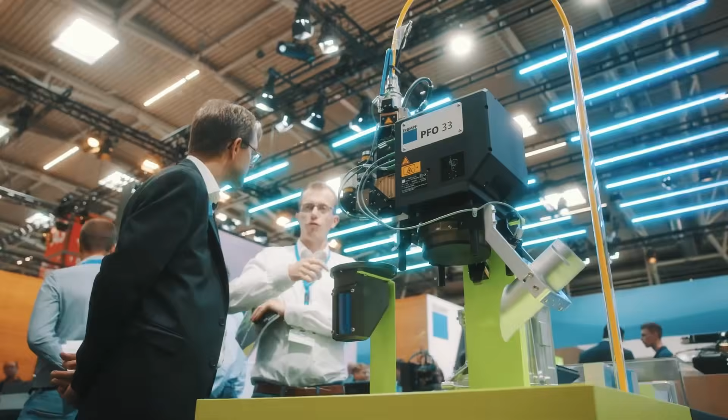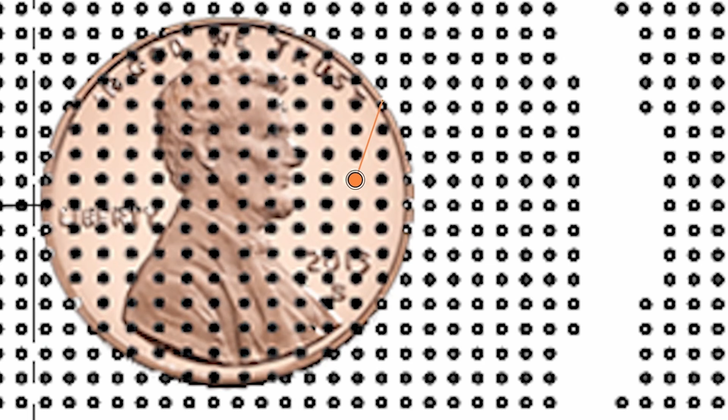Eastern, 3 p.m. in the UK and Ireland, and 4 p.m. Central European Winter Time. This session explores the latest advancements in laser cutting and drilling technologies, two areas transforming industrial manufacturing in aerospace, automotive, electronics, and medical devices. Laser cutting uses a focused beam to melt or vaporize material along a precise path, while laser drilling creates micro-scale openings in metals, composites, and polymers. Together, they drive efficiency, precision, and sustainability across production lines worldwide.

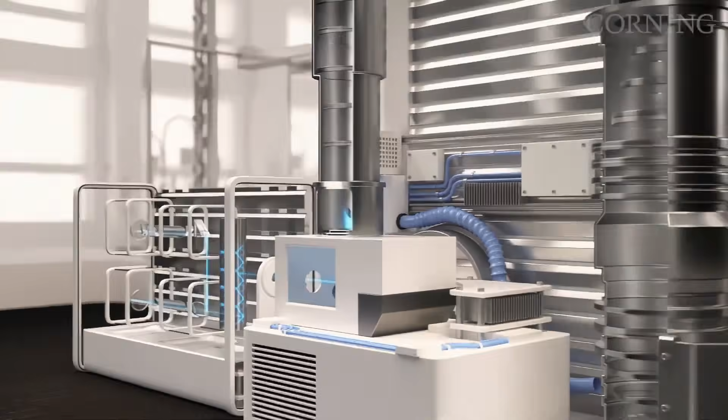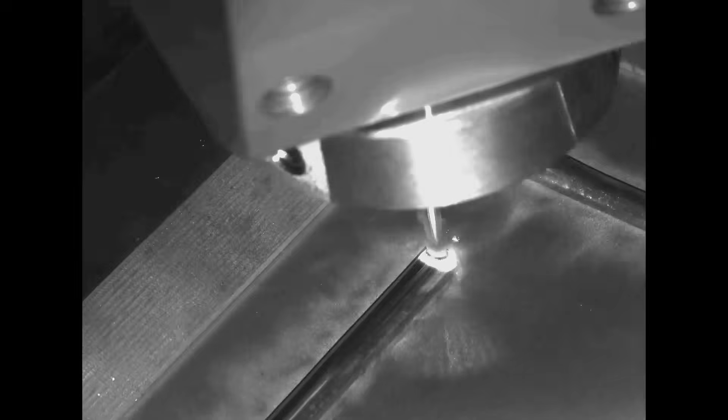We'll have featured speakers from Corning, Precitec, and Trumpf. We expect to hear about metal additive manufacturing, making it possible to produce intricate geometries that traditional methods can't achieve.

And representing technology enablers, we welcome active Optica corporate members, RayVen, Akoneer. Akoneer is doing laser machines. And who can forget the demos in Munich from Fluence Technology. You can knock it, bang it, but the pulses, they are constant, they are stable.

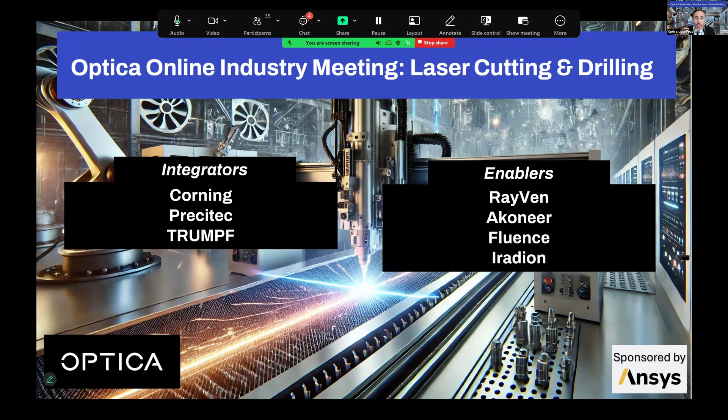Over the next 90 minutes, all of you are panelists. All of you are here to share what you can do for others and what others can do for you.

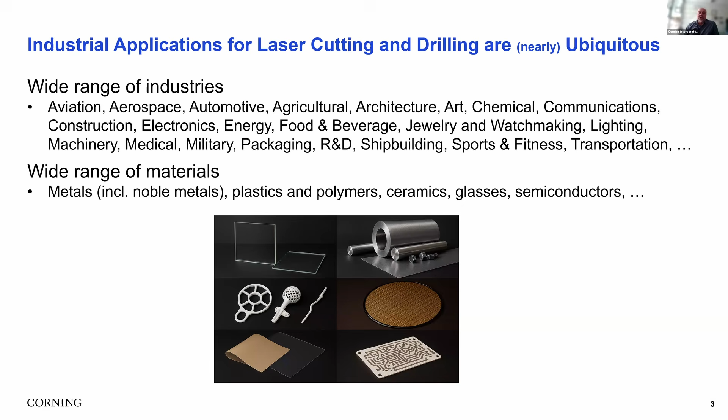Lasers are used to drill and cut virtually any kind of solid material. They're used in cases where you need very high precision, or very low loss of materials, or very difficult materials to cut. So they have very powerful advantages: high material utilization, very high precision, like I said. They also have very large process windows, so they're very stable.

And there are very strong trends in the industry that are favoring the large adoption of lasers, including miniaturization, which is pushing very high precision, automation, which is pushing scalability, low cost, things like the integration of Industry 4.0. We're developing next generation of materials, composite materials. We're using a lot of glass, very Corning here. So we've got thin, brittle materials, things with coatings.

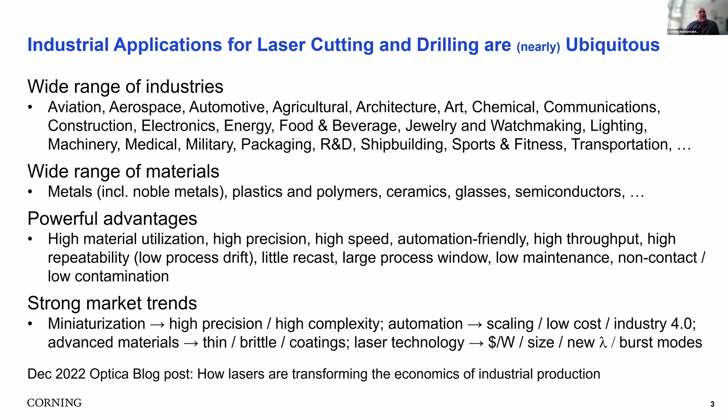And we also have rapid progress in laser technologies themselves. So you've got the sort of dollar per watt trend is decreasing, so things are much more affordable now. You've got size and form factor of lasers that are reducing, and you've got new wavelengths, things like burst modes. They're enabling lots of other additional laser technologies. And if you want a little peek into this, there's a plug here for a December 2022 Optica blog post, how lasers are transforming the economics of industrial production.

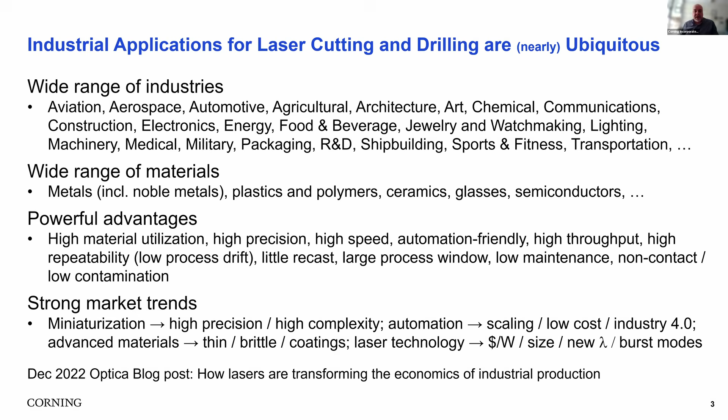So let me give you a little bit of insight into how to get all this started, what's important. We've got critical inputs here to your laser process around wavelength and pulse energy and the kind of optics that are used. Generally, people use Gaussian or focused optics to create focused spots. There's also other flavors of optics, such as Bessel and non-diffractive optics, flat beam, flat top optics, vortex beams, and a whole other slew.

You can even interfere beams together and create large area arrays. So you generally have a separation, or two different modes. You can have a thermal process, and these are more on the continuous wave optics side. This is basically ablating, or heating and vaporizing material. You can see here sort of a ChatGPT-looking image of volatilizing material. It's coarse, but it's very widely applicable.

Or you can go the other range and, with ultra-short pulses, start ripping electrons off of materials and creating very precise plasma plumes. This has a minimal heat affected zone, can be very precise and very powerful.

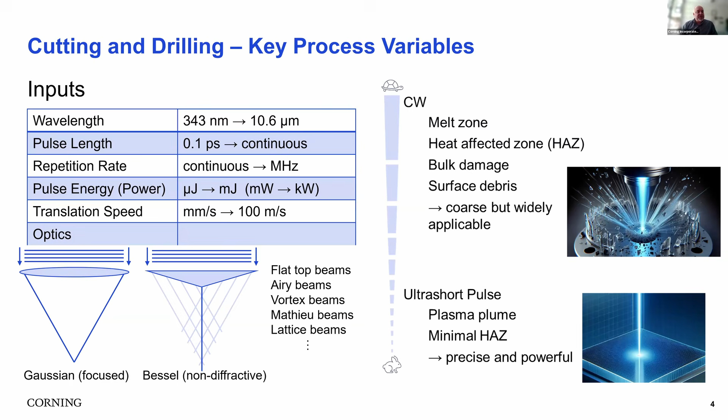In terms of outputs, you've got lots of quality metrics here about strength, edge strength if you're cutting, straightness, and if you're using a brittle material, you've got chips and potentially resistance as you're separating materials. On the drilling side, you've got surface strength, wall roughness, and if you're making holes, you're looking at maybe circularity or the concentricity of a top hole and a bottom hole.

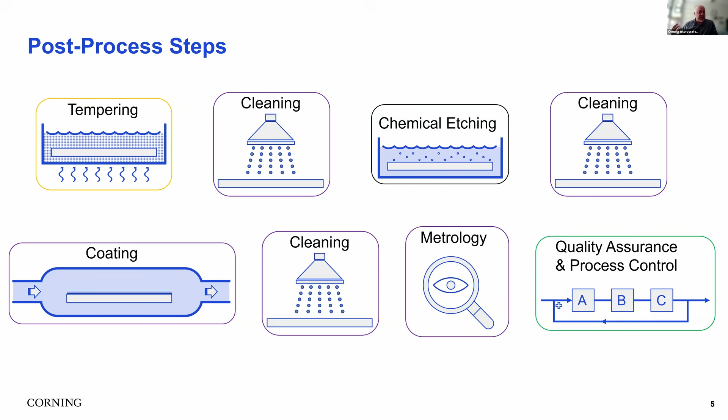If you're making vias, maybe you've got incomplete vias. So it's a very wide range of quality metrics. Don't forget, you've got post-process steps. You need to potentially temper the material once it's been cut. You've got chemical etching or coating, several cleaning steps as you remove debris or accumulated environmental contamination. There's a metrology step that feeds into quality control, and then QA and process control where you feed everything back and improve your process. This is in addition to packing, shipping, and all the other processes as well.

Let me make a little plug here for precision machining in glass. You can use Bessel beams, or non-diffractive beams, to cut very rapidly through glass in a process almost like tearing a paper towel. This is a very rapid way, a meter a second or even more, of cutting very thin brittle materials such as glass. You're looking at damage and etching of vias. You can do this by creating damage sites in an array, then use etching to expand those damage sites into vias. This can be used for, say, the electronics industry.

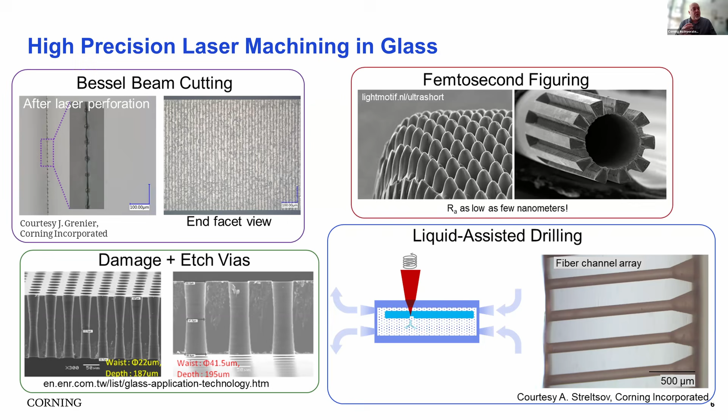In order to work very precisely with a low roughness figure, you cannot beat femtosecond figuring. This can apply very smooth, nanometer-level roughness if you've got time to do it on materials. You can even use more sophisticated processes such as liquid immersion if you want to really mitigate thermal effects and create complex, long, high aspect ratio channels.

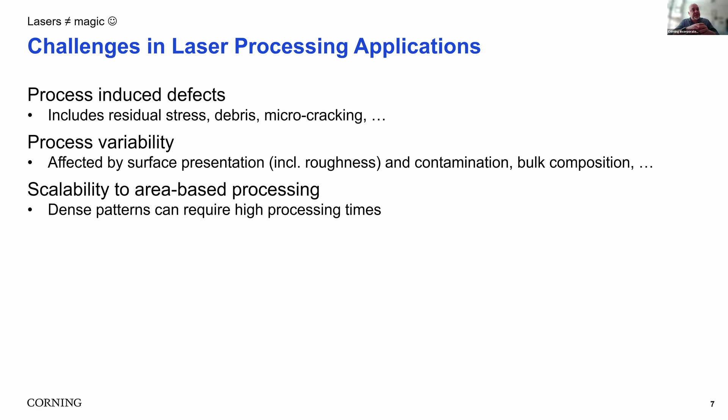Still, lasers are not magic, so there are some challenges in laser processing applications. One is process-induced defects, which can include things like residual stress or debris. You've got process variability, so lasers can be sensitive to roughness or waviness on the surface, contamination, and potentially bulk composition uniformity. There's certainly a challenge to scale laser-based processes to dense arrays, trying to make very small textures across very large glass, for instance. That can be a challenge in terms of time and cost.

Overall cost for the system can be a challenge if you're using things like ultra-fast systems, or you need a lot of them to cover a large area, so capital cost can be a challenge. And then, as we look to transfer new processes into manufacturing, there can be a challenge with this technology transfer piece - that's receivership, either process receivers or equipment receivers. This requires highly trained staff, so that has been, and can be, an obstacle.

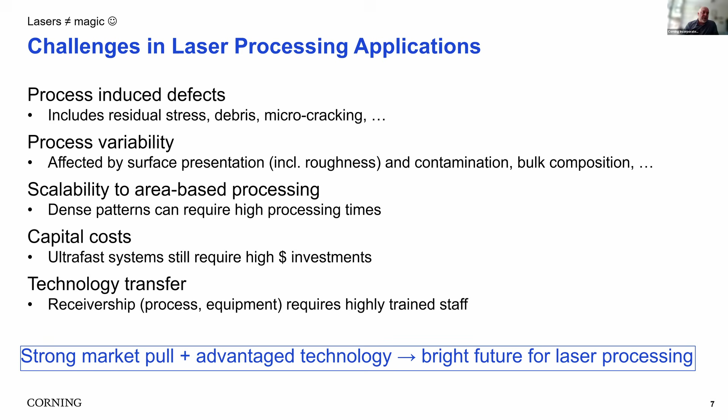But overall, a very strong market pull, very strong trends in advanced technology using lasers. So I think there's a very bright future for laser processing, and I'm excited about the rest of the panel here and the kind of technologies that they're presenting.

Thank you so much. And actually, if we can put your previous slide with the challenges back up - yeah, this is one of the things. What are the major challenges for Corning, and what can the industry help you with? What could be coming from the industry, from the neighbors, to help Corning succeed on these challenges? Yeah, certainly - sorry, was that a question to me? Yeah, that's a question to you. That's a question to Philip, yes.

Well, certainly, because we have a lot of brittle materials, ultra-short pulse lasers are a key component of how we do laser processing. So the cost, form factor, and reliability of that technology is a big part of it. If I had to pick one thing here that could be influenced by the industry, it would be to keep advancing this ultra-short pulse technology - short picosecond or even femtosecond - to move it from the lab into robust manufacturing. That would certainly be a plus. Lots of things we do here are done as an exhibition or as a concept, and when we look to scale, it's just too expensive.

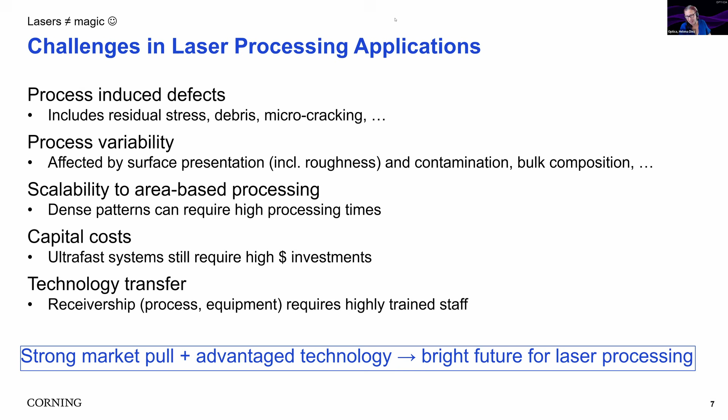Thank you very much for giving me the floor. Yeah, I would say it's a correct address if we want to discuss this. Corning is glass, glass is Corning, and Fluence is building tools for cutting and drilling transparent materials, including glass. And Philip from Corning mentioned that drilling is now a more interesting and novel topic in glass processing.

And I don't have much time. I will try to cover the most important, interesting aspects of glass drilling and cutting using a femtosecond laser, like 250 femtoseconds, which we build at Fluence Technology.

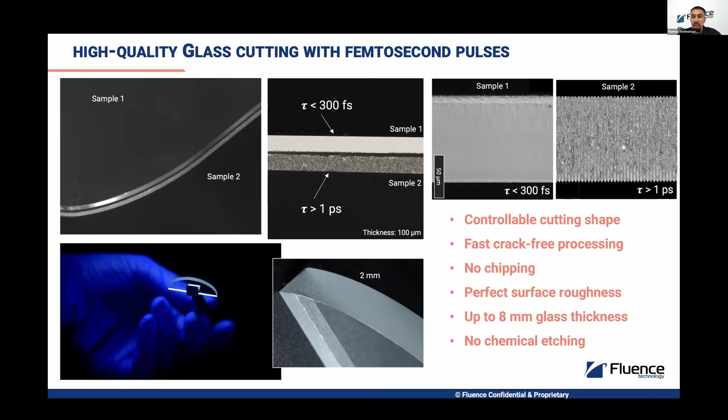Up to 3 millimeters. On the slide, we show soda lime 2 millimeters, but even with 200 microjoules and 30 watts of power, you can cut up to 3 millimeters of glass in a single pass using our approach, and up to 8 millimeters with multiple passes if necessary.

Everything I showed was done and can be done with the Jasper X1 laser that we have at our application lab, where we gain experience in micromachining and help our customers have the best laser tool for glass processing.

If we discuss this topic, it's not only glass processing. Our Jasper X1 is an all-fiber laser. The main idea and feature is to have an environmentally stable laser system which can be mounted in any orientation, has quite high vibration tolerance, and no free space oscillator, which is a very important part of the micro laser system, decreasing the cost of ownership of the laser and the whole micro-machine system where this laser can be installed.

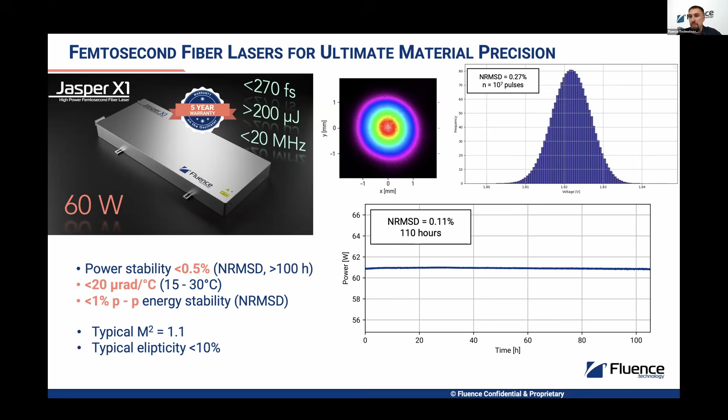We want to learn a lot more, because what you're doing, Ilya, is fascinating. But allow me to go back to Philip. Philip, it is great to have Corning with us.

We want to understand a bit better the main challenges for increasing throughput. We have many people here in the room that can help you with these challenges. Could you summarize what is the main challenge you see in making laser cutting and drilling faster?

Cutting typically is pretty fast if you're making one-dimensional cuts, so you're cutting out borders of things. You're limited by the acceleration and deceleration properties of either the optics, or if your optics are translating, or the material as you're translating it.

So the throughput can be increased - there are ways of parallelizing cutting. If you're making smaller parts, you can split a beam or have multiple beams creating parts in parallel. Typically the cutting piece is okay from a throughput-per-cost standpoint.

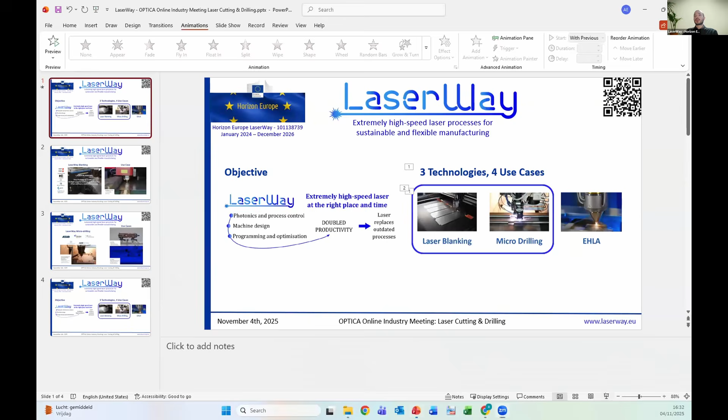Yes, let me share my slide. Can you see it now? Crystal clear. Okay, well thank you, Jose. Thank you, Elena, for the opportunity. Good afternoon everyone, my name is Arturo Elias Jumbet, and I am the Dissemination Communication Exploitation Manager for the project Laserway.

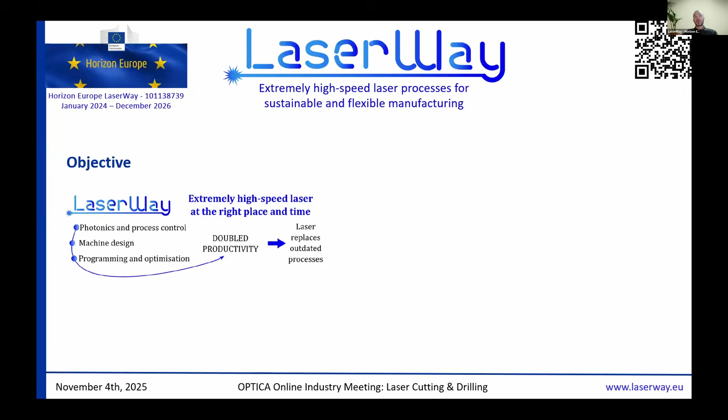What is Laserway? Laserway is a Horizon Europe project whose main objective is to develop extremely high-speed laser processes for sustainable and flexible manufacturing. By doing so, Laserway is innovating in 3 specific fields: photonics and process control, machine design, and programming and optimization. There are 3 technologies within the project with 4 use cases, but for the sake of this meeting I will only focus on laser blanking and micro drilling.

I will briefly introduce the partners involved in each solution. For the Laserway blanking solution, we have Fagor Arrasate in the Basque Country, they are the machine tool builder. Fagor Automation is working on the programming and the control in the process control. We are using innovations from Precitec on the laser head to allow cutting accurately and at extremely high speed. Compotech is providing lightweight composite structures to facilitate the fast movements of the gantry in this machine.

Video Systems from Italy are providing solutions for in-process quality control, while ModuleWorks in Germany is working on algorithms to optimize the process and also to make it more sustainable in terms of scraps production using nesting algorithms. RCMT and IDEKO are R&D centers, and IDEKO is the coordinator of the project. They are working together with the rest of the partners in designing the machine and optimizing the process.

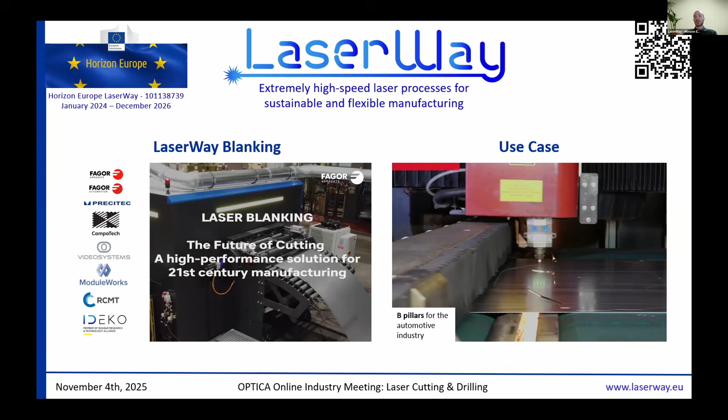The main use case for this big machine is the production of B pillars for the automotive industry - I mean, the use case within the project. But the idea is to really provide a solution to this industry in which small to medium-sized batches can make use of the flexibility of laser cutting, which is of course in opposition to the wasteful and more conservative press blanking that is used in this industry.

In the Laserway micro drilling solution, we have Tekniker, also in the Basque Country, leading the developments. They are working together with Cedrac Technologies on innovating in the laser head for an accurate and faster drilling process. Video Systems is also providing quality control solutions here, and Azud and Aernnova are end users, and they are providing feedback to the developers on the 2 use cases for this solution.

The first use case is coming from Azud. They are specialized in providing water filter solutions for agriculture. And the idea is, with this huge machine, to produce filter cores for these water filter systems. The second use case is also provided by Aernnova.

It is a technology previously validated in another EU-funded project. And the idea is to manufacture big micro-perforated leading edges for aircraft wings to implement the hybrid laminar flow control technology. This technology allows these micro-perforated panels to decrease the drag forces on the plane, and it has the potential to reduce fuel consumption up to 9%.

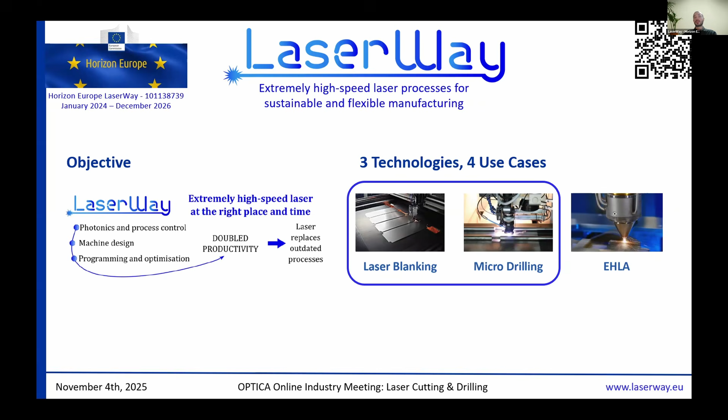Well, that's briefly what we are doing in Laserway related to laser blanking and micro drilling. And of course, if you have any technical specific questions, you can visit our website, you can contact me, I will leave my email in the chat. And of course we will be pleased to collaborate with you, and if we need the expertise of any of our partners, we'll be happy to connect you. Thank you very much for being here.

We do have challenges, so let's start the meeting as it should be, with the challenges. Allow me to go to Columbus, Ohio, to give the floor to Ofek Navev from Transmed Corporation, because he has a challenge for all of you. Ofek, thank you, welcome for the first time at the Optica Online Industry Meetings. Tell us what you do and challenge the people in the room.

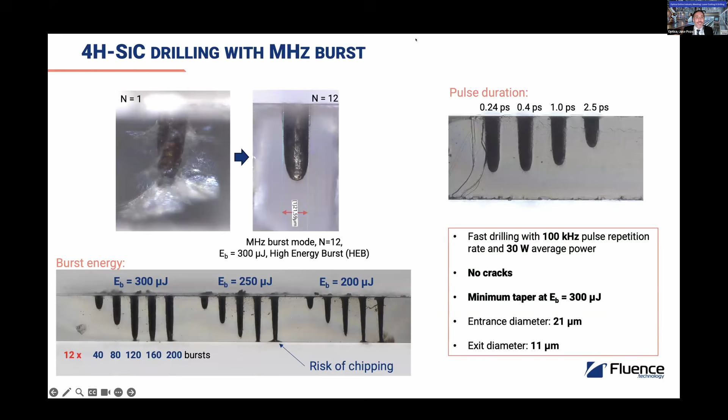That sounds like a challenge for a very good laser head. Later on you'll see a presentation from Markus from Precitec, but before that there's going to be exactly 45 minutes to answer the challenge. Just to remind everyone, we need a 6.35 millimeter, quarter inch deep hole with 0.05 millimeter radius, and it has to be exactly straight - we need to find that on silicon carbide. Ilya is smiling from Fluence, Markus smiling from Precitec, and there are other people very happy right now. Also Trumpf is smiling. I leave the floor to Helena to continue moderating the event.

Thank you so much. Someone very, very good at giving all the systems for laser cutting is Precitec, and it's my pleasure to present Markus Kogel-Hollacher. Marcus, the floor and attention is all yours. Good to see you again, and I hope you see my slides already.

Very good, excellent. So yes, we are coming from the very innovative stuff to the boring old-fashioned cutting, but hopefully after my presentation you'll see it's far from boring. The work in laser cutting, even of metals, is getting more and more exciting, and this has many topics. You'll see in my presentation: what if you no longer need to take care of your cut quality anymore? What if the machine does everything for you? Let's see.

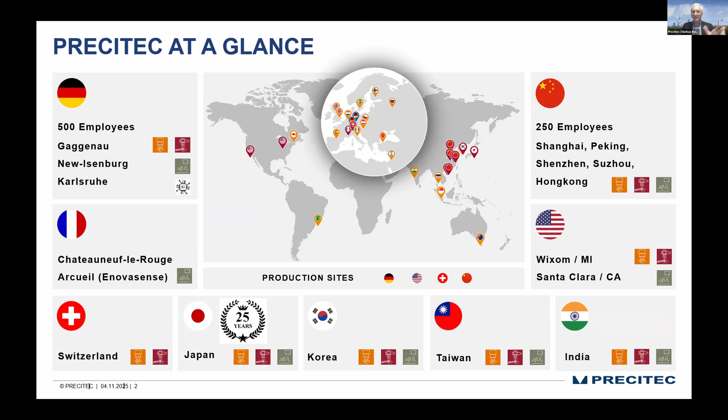Not 12, I'd say 12-13 years ago, there were already discussions on thermal focus shift in processing optics at 4, 5, 6 kilowatts laser power. Now we're talking about 200 kilowatts, and we're still talking about transmissive optics. We're happy that all glass manufacturers have also innovated a lot in recent years to build pure glasses we can use in our optics, with very few absorption in the bulk material. The same goes for the people who do the coatings - very few absorption in the coating layers. So these innovations, these companies, make us capable of working on these new cutting heads, and yes, we are trying to replace plasma cutting.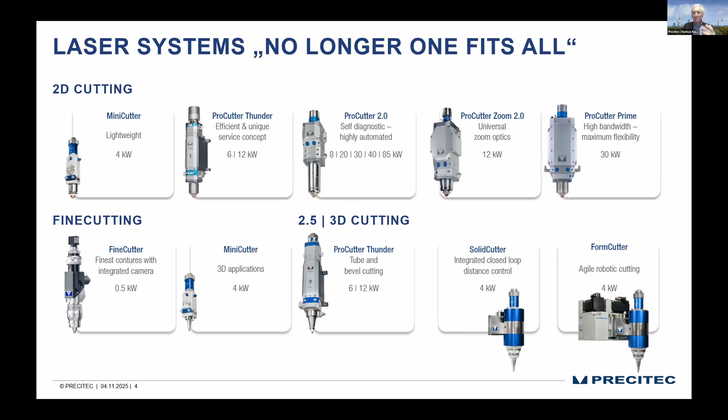So yes, we are applying photons into processing heads for cutting. You see the family of laser cutting heads increasing over the years - from small to large, from 2D to 3D, fine cutting. You'll see a little bit of all of this during my presentation. This is important: if you still want to be a global player in cutting, you need to have that family of cutting heads.

So, but if customers see that slide, they just think, what does it mean for you? And let us take care. Let Precitec take care, and let us take you by the hand and show you what is the best for you. So we start with ProCutter Prime today. This is our latest innovation, a cutting-edge product which has a lot of features inside, and you will see those features during my presentation.

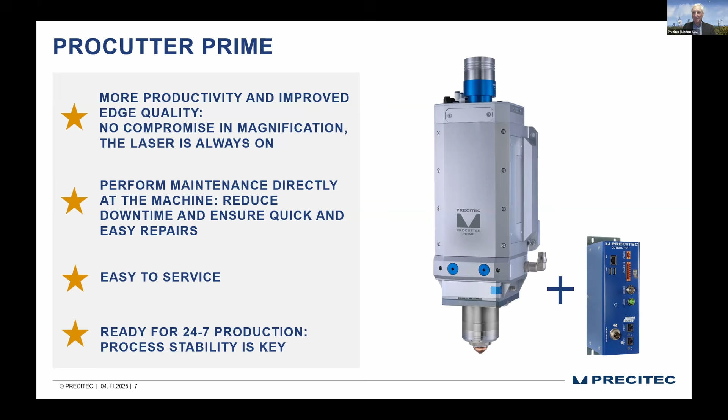And it's important to have those features these days. So it's not just photons in, photons out with some capacitive distance control. We have a lot inside the cutting head.

Important is also how we build the cutting head. I'm always a little bit careful if I talk about the cutting head being easily serviceable, because typically we say we don't need any service. But if there is service, you see that there are a lot of cover glasses now inside our cutting heads in order to protect the optics, because any kind of small dust on the optics will directly kill it and will not make the process work anymore.

But yes, as I said, there is a lot inside the cutting heads, which is also based on AI. We have a lot of software in the CutBox Pro, which is the system connected to every cutting head. And one important thing is that we vary the magnification during the piercing process.

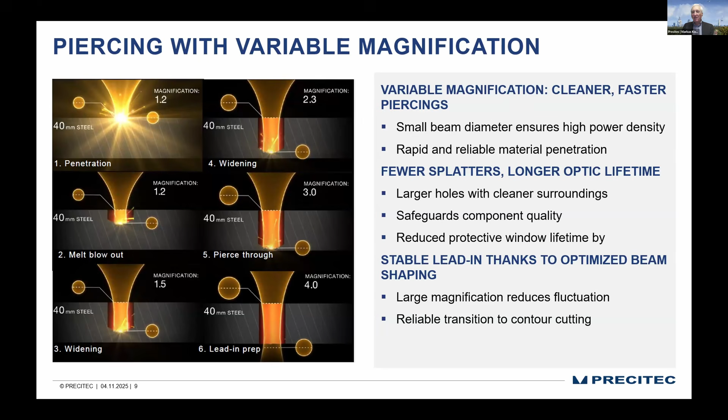You see here from step number 1 to step number 6 how a piercing process in thick section steel, this is a 40 millimeter steel sheet, works, where we start from a magnification of 1.2 to a magnification of 4. You see that we gradually increase the magnification, which is important to have a very fast and very robust piercing process, because you lose a lot of time if the piercing process is not as fast as possible. So large magnification reduces the fluctuations, and it's reliable.

The same, and this is even also important, the same when we start the cutting. We see on the process emissions and on the response of the sensors some of the process radiation, and on process radiation we can also react. And for sure we need to work on different magnifications also when the sheet thicknesses increase. So this is also one important factor of those moving optics in our cutting heads, that we can easily increase the spot size, the magnification, and react on different sheet thicknesses.

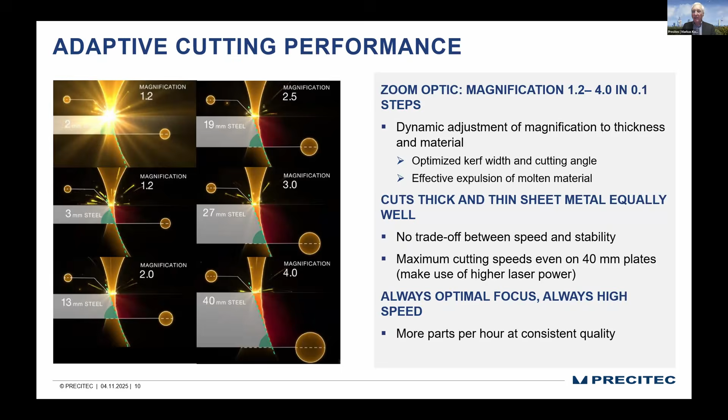And you as a customer in your machine, you can just put in any kind of sheet thickness, and the processing head will align to it and make it work fine with an optimized kerf. Everything is effective and everything is fast. It's all ready for 24/7 production. This is important.

Here you see one of the processes where we already apply artificial intelligence. What we actually see is on the sensors inside the processing head, that some of the optics are heating up, which means we have a thermal focus shift. If we don't do anything, we will lose the focus. It will shift from the middle of the sheet to the top layer of the sheet, and the cutting, you will lose cutting.

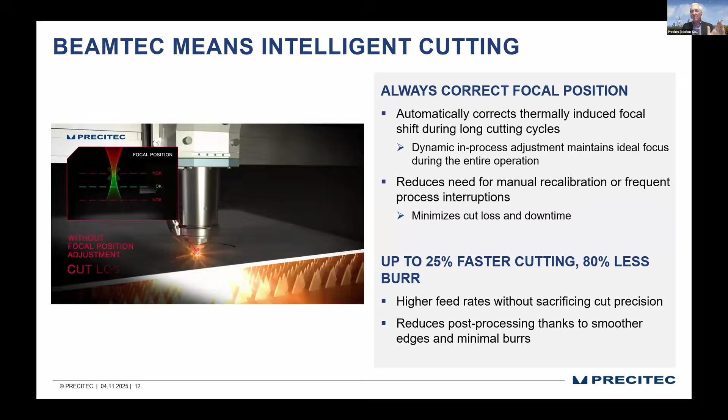So it's important when we know the temperature of the optics that we react accordingly. And reacting accordingly means we also use the same optics which we use for magnification in order to shift the focus to the right position.

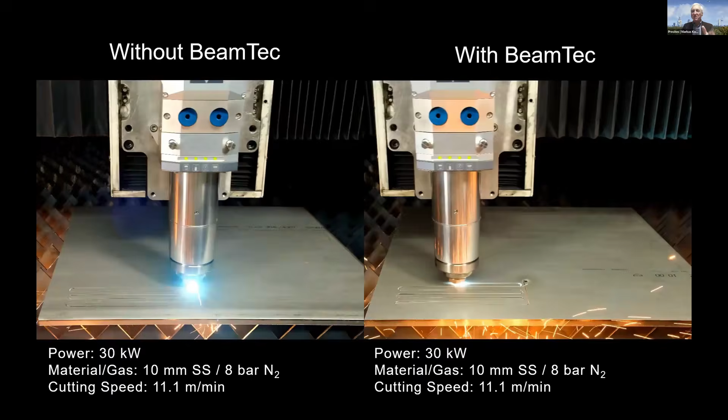And here you see how it's working. On the left, without BeamTec, which is our software tool in our CutBox Pro, which is measuring all the temperatures of the processing heads and changing the focus position accordingly as we see that there is focus shift. And we know that based on the laser power on time, we know that on the temperature. So there are a lot of sensors working for BeamTec in order to keep the focus point at the right position, in order to never lose the cut position, never lose the focus position.

And by doing that, we have 80% less burr, because we are also keeping the cut quality in the desired region. So this is BeamTec.

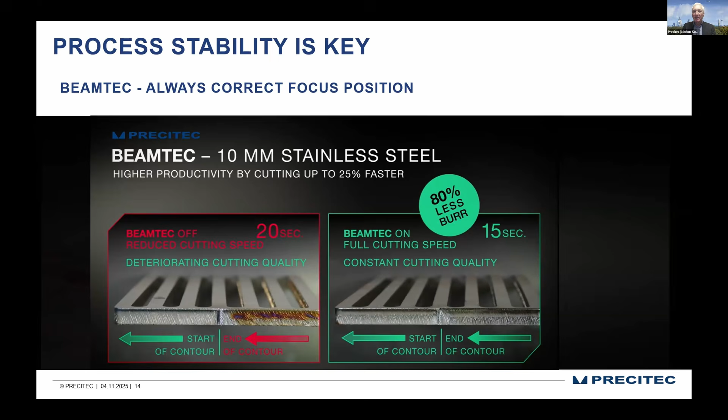BeamTec is actually, I would say, the first Precitec product where we applied AI modules on laser processing. There's a lot of sensors in a Precitec cutting head, especially in the ProCutter Prime. We have the PierceTec, which is the intelligent piercing process, the Lasermatic, which is the capacitive distance control, and BeamTec, which keeps the focus at the right position.

We have the fast autofocus. We have temperature sensors, as I said, we need temperature sensors in order to measure and monitor all the heat in the cutting head.

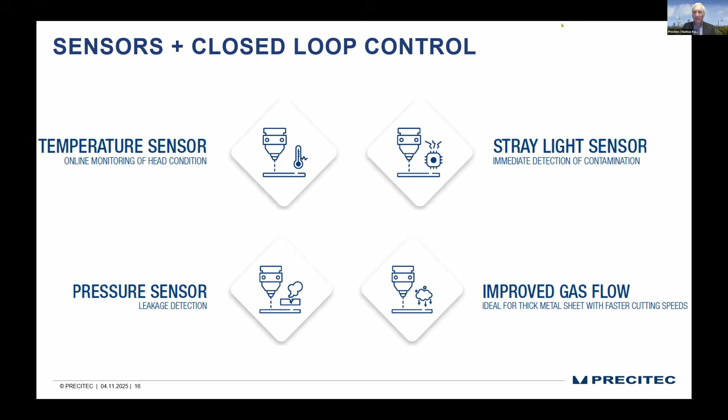Stray light sensors are important also to see if there is the start of a little bit of contamination. You will see this in the stray light sensors, and then you can react accordingly. So we try to have a fully safe cutting process, and whenever something goes out of process, we can stop and give alarm signals.

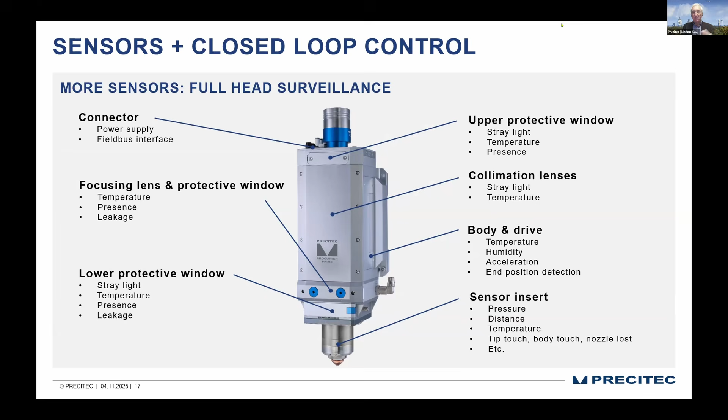So this is what you see here, just on a different scale. A lot of sensors and where they are mounted inside the cutting head.

And yes, with all the sensor technology, with all the closed loop controls, we can also always provide the best cut quality on different materials. Here's just a fraction of materials.

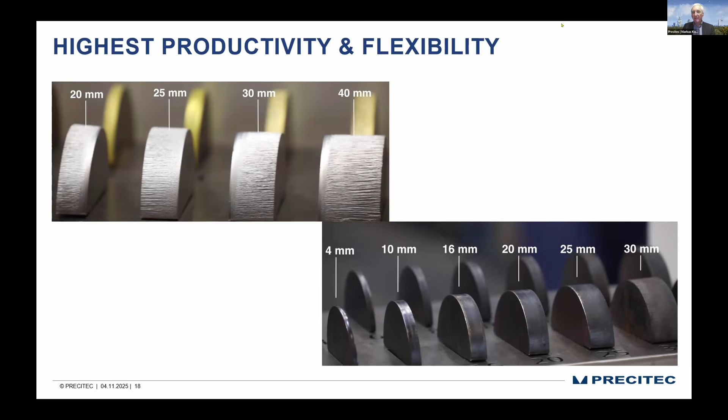And material thicknesses are getting higher and higher and higher as we want to compete against plasma cutting. And as I said...

Lasermatic is, let's say, the first patent which was applied in 1968. 1968, you have to remember, this is a long, long time ago. And Kimla, one of our customers here, it's not only the Lasermatic, it's also the machine which has to work with the sensor, and they do it...

Impressively accurate. So this is just a video which I found on LinkedIn, which is showing how good you can work when the processing head is working together with a machine builder. Then you don't have to fear that there is any collision during your process. There will be no collision during your process.

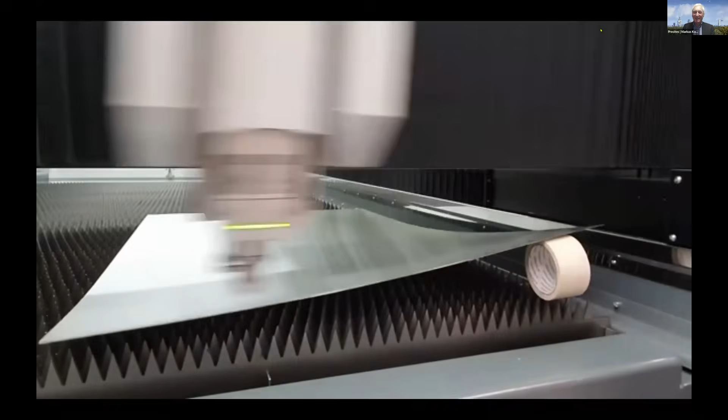For sure, this is without laser radiation. I heard some comments during the rehearsal, but I find that very, very impressive. And yes, thanks to Kimla for their excellent partnership over the years.

And yes, for sure, we are also working in the other region, in the micro region, with different wavelengths. So from the short of 355 to the infrared, maybe also one time 2 micrometer. If there is a market for 2 micrometer, this is what we call fine cutter.

Typically, as you see, it's something like stent cutting, but there's a lot more cutting applications also in the consumer electronics industry right now with that technology, with that fine cutting head.

And yes, as you see, we definitely also work with monitoring devices, online monitoring devices in laser cutting as well. And this is my presentation, and I'm open for questions.

So if it's about choice, we think we have it all. I think there's nothing missing from the Precitec product range with respect to laser cutting in medium and ultra thick section materials. And if you have questions, we're guiding you.

And we are still innovating, as you see. We are still innovating the cutting world. I think we will be the first ones who will have a 200 kilowatt cutting head on the market. But still, if you want to challenge us, try it. We are happy to work with you.

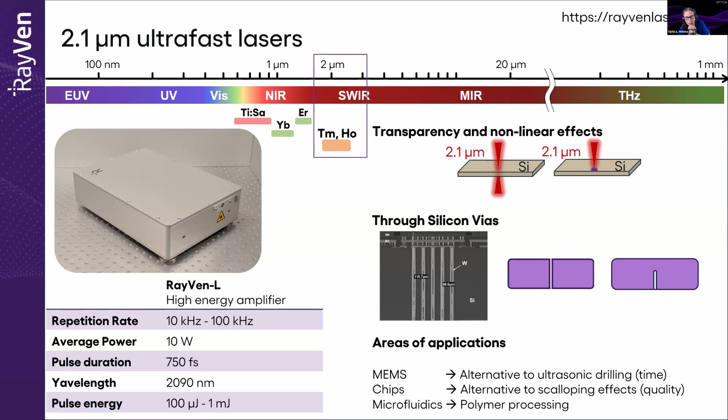So there are a lot of people in the room that can be contacted for consideration of your laser. Now I would like to give another perspective for laser cutting, and call on Christoph Wunderling from Irradion laser. This is a totally different approach. Christoph, could you please open your camera and show us what Irradion can do for laser cutting and drilling?

You are mute. Can I hear you? Thank you very much, sorry. Can you see my screen in presentation mode? Yes, perfect.

So thank you very much for having me here in this event. Very interesting discussion, and I think there is some kind of transition from the last presentation from Celia to now. What I want to show is our laser opportunities for semiconductor and microelectronics processing, because in my opinion, these industries are a paradise for lasers.

My name is Christoph Wunderling. I'm product manager for short pulsed and ultra short pulsed lasers at Irradion. At Irradion Laser, we are a key supplier for these two industries, and these industries are very extreme for us because we need to be very innovative, because these are industries of the extreme.

Thank you very much. I hope you can hear me and see my screen. It was already necessary to put on the lights because it's getting dark outside and time is moving forward. So I want to introduce Trumpf shortly and myself, and go into some application details.

Trumpf is family owned, a technology leader, as you introduced it. Thank you, Helena. We're customer focused, so we have over 70 subsidiaries all over the world, close to the customers. We're innovation driven, with many funded projects and scientific areas where we work on photonics. It's also a sustainable company because our owning family really values that highly.

Trumpf has a wide portfolio of different laser technologies and different machines, including machine tools. We go from big dimensions - we've seen 40 millimeter thick sheet metal - but also high precision. We're able to go into the femtosecond regime in microprocessing, thin copper films in this case for electronics or semiconductor industry with femtosecond lasers.

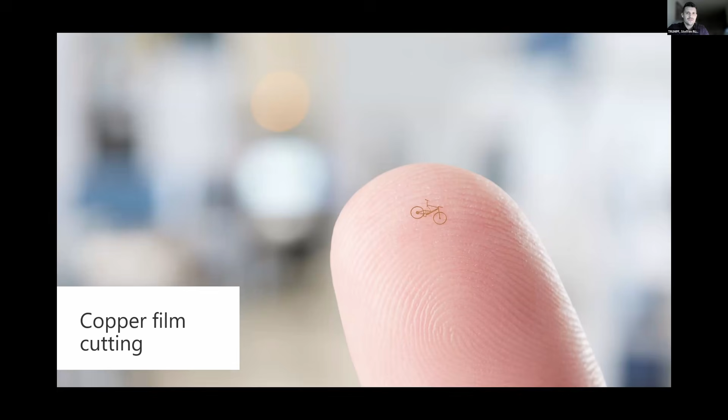In combination with the right optics, we deliver the laser sources. We also have global application centers where we can do testing - one in Santa Clara, one in Germany at our headquarters, and also China and Korea, where we're represented with our own application labs.

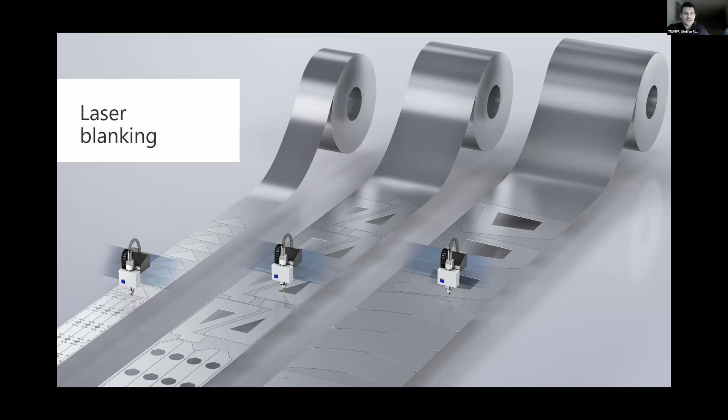We also heard already about laser blanking, so large dimensions, not micrometers but meters. We have coil editions for our TruLaser 2D cutting laser system. That is a machine tool business unit, but it also helps raising productivity and reducing waste in large scale productions, for example automotive.

Then we've already heard about silicon drilling, silicon processing for the semiconductor industry - that's also where we are present with our laser sources. We're present with our application experience, and we can support and go into details to adjust and find the right laser parameters.

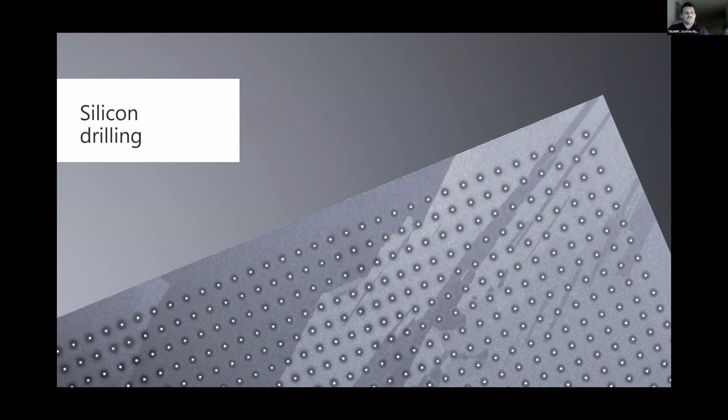For metal drilling, we've heard that laser cutting or drilling isn't like mechanical drilling, but deposition of energy in a really small focus. There are different optics, different scanner systems. Beam shaping also helps improve laser drilling, and this goes into membranes, filters, large area applications, into water filters, for example.

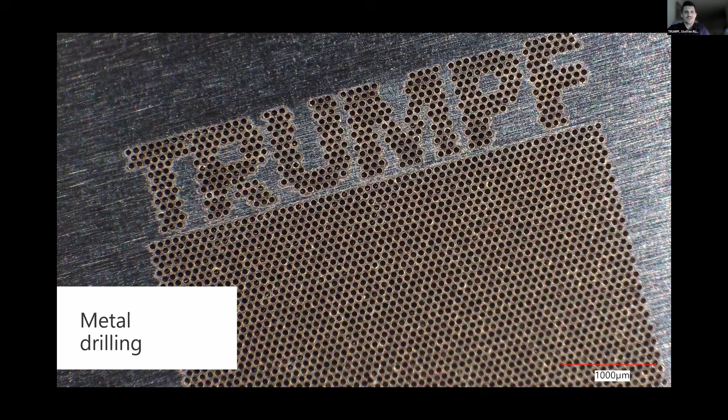So there are many industries and application ideas or possibilities where you can use the laser. Looking more into industries, for example inside a car, there are many laser applications. I just want to highlight two of them - one is the brake disc.

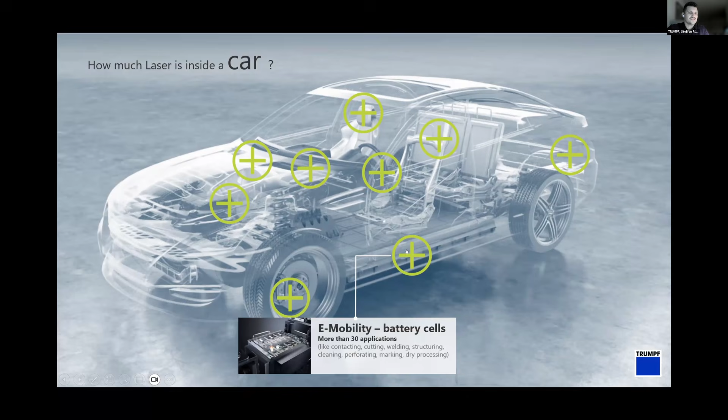I hope I can choose this one here - the brake disc, where we use high-speed LMD. That's not cutting or drilling, but still a laser process to coat for environmental improvements. More laser processes are used in battery module manufacturing, like cleaning, contacting, welding. There are many applications you could go into, and as you can see, there are many more around the cars.

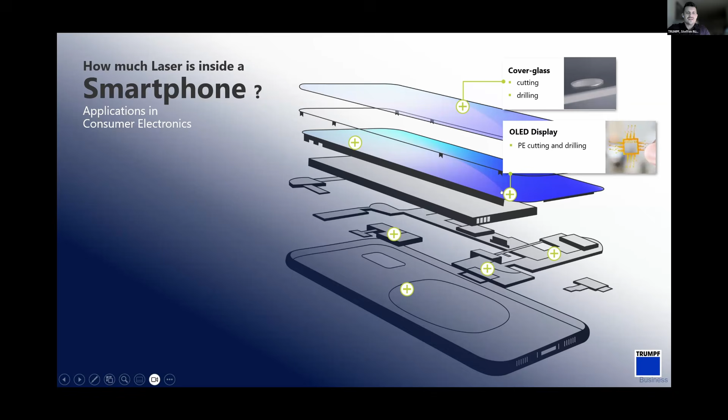But also in other industries like consumer electronics, the smartphone is really present in all our hands. We go from cover glass cutting or modification and etching - we have the laser sources and optics for really challenging processes to increase the damage threshold there, or OLED cutting, like film cutting with the UV femtosecond laser, for example.

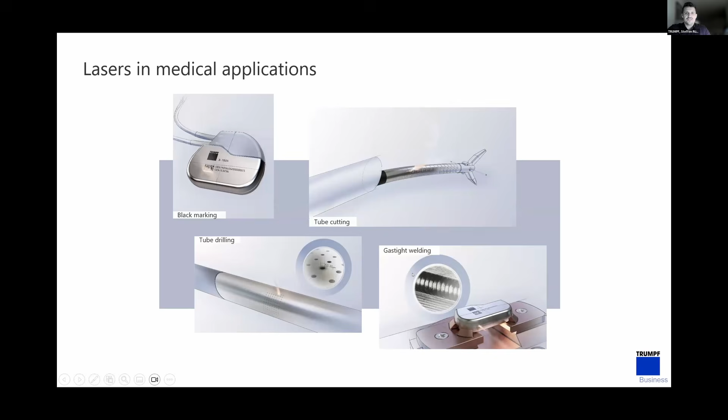We have seen stents being cut in the video before, so that is also possible with the TRUMPF laser, with solid-state optics, or with a scanner also. And the welding is also a possibility. So for each industry, there are different materials. We have heard a lot about glass.

That's also an application we work on. And I mentioned in the comments section that depending on the thickness of the glass, the aspect ratio, the roundness requirements, there are different laser parameters. That's an advantage of the ultra-fast lasers: to adapt pulse duration, pulse energy, burst modes. We've heard questions about gigahertz burst. So there are different possibilities.

Not only does the laser modification need to be adapted, but also the material, the laser process, and then the following processes like etching, coating, and so on. There are many more processes, and in the end we want a good final product, and the laser is just one part of it, needing to match into this whole puzzle.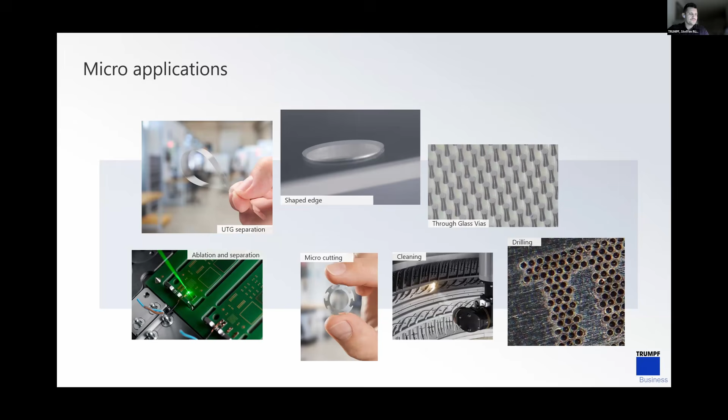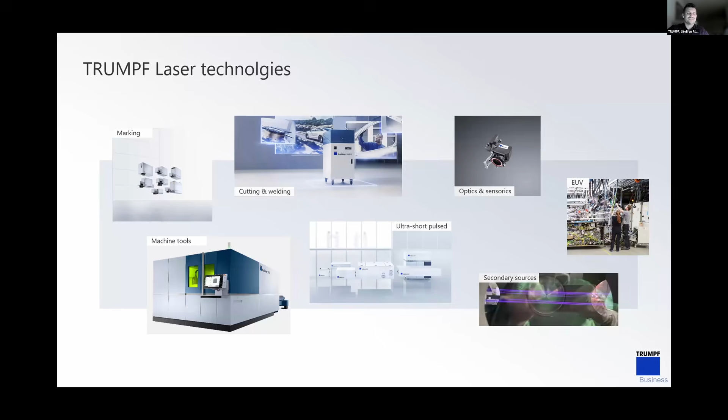That's our approach. And now for OFEC, the challenge is accepted - well, it was beforehand, but the challenge is accepted for different technologies. Feel free to contact me or us if you have application ideas to go into. I'm happy to support.

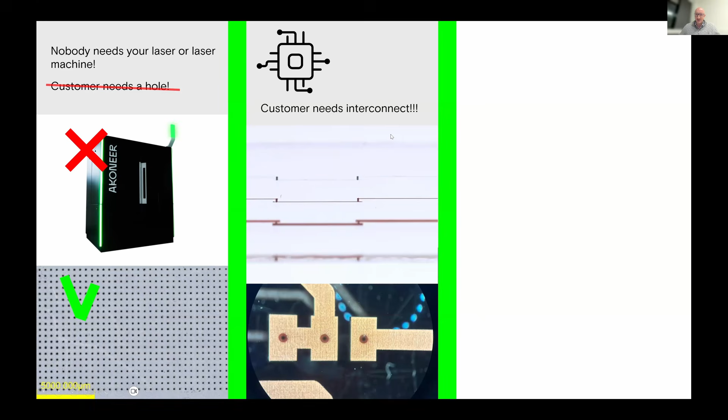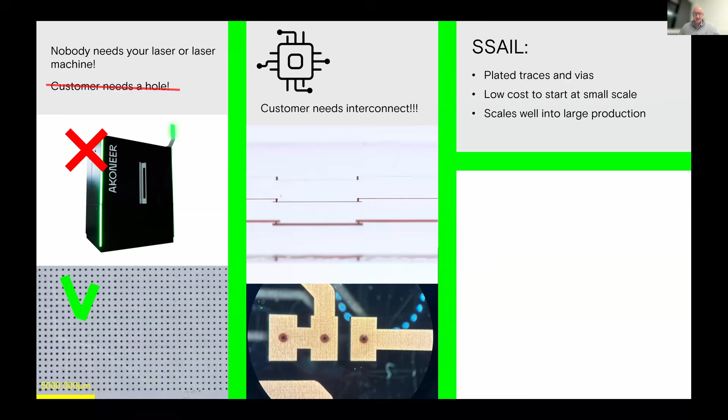That's a situation where one of our technologies comes in, where we are doing both things at kind of the same time with the help of laser. So we are drilling the vias, be it glass or some other material. And we also have a special laser plus chemical process where we can plate copper traces and copper into the vias to do something like that.

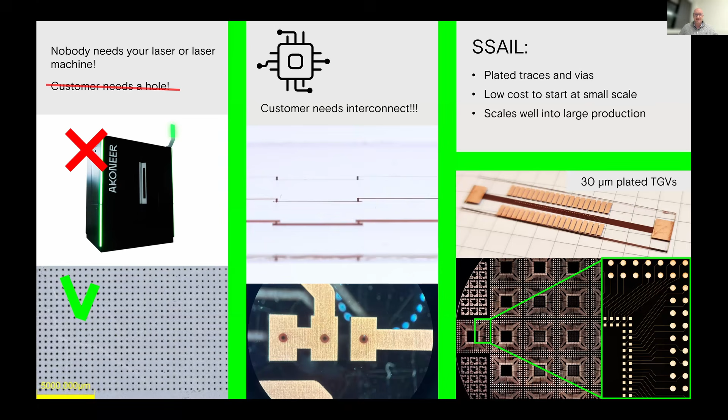So just a reminder from us to always look at the whole process and take all process into account, because when you focus on the very small area, those local efficiencies don't really matter that much.

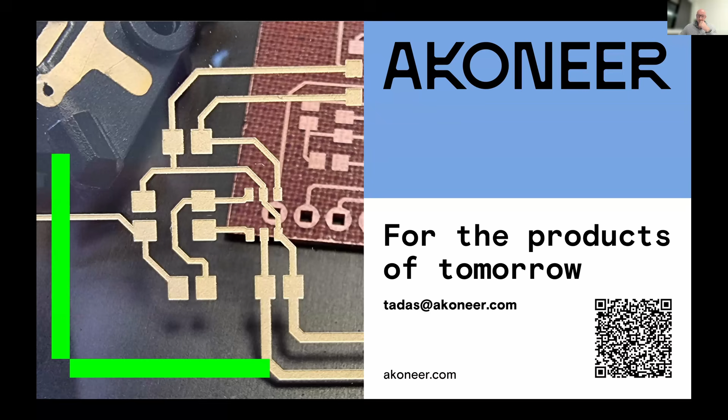So I don't know if we would take the silicon carbide drilling challenge ourselves, but I have some ideas to suggest where to check it out. So probably I'll make a list of that. Also, 2-micron lasers and silicon is an interesting thing.

Maybe we can achieve in silicon a very similar thing that we are achieving in glass—not only to form the via, but to also enable plating directly after the via in silicon to have that interconnect instead of just a via. So I'm quite confident that something like that could be achieved with 2 microns as well.